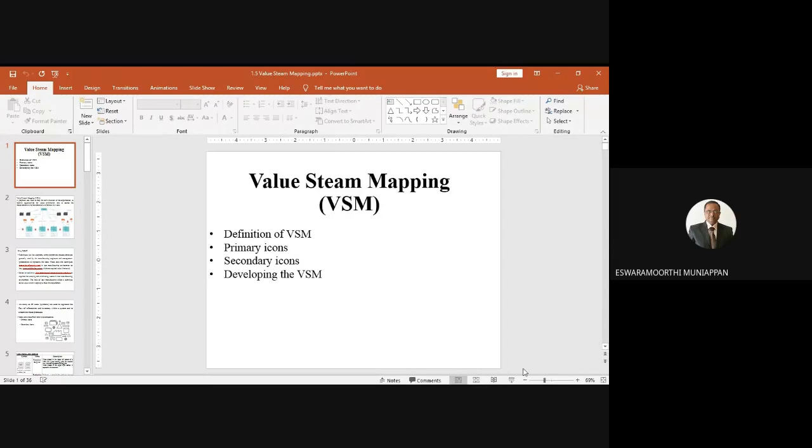Okay, value stream mapping, the icons, or we can say symbols used in value stream mapping we discussed, isn't it? Is it clear? Yes, sir. Okay, right. Today we will see how to draw a value stream mapping. Can you see the presentation? Anyone? Yes, sir. Okay, right.

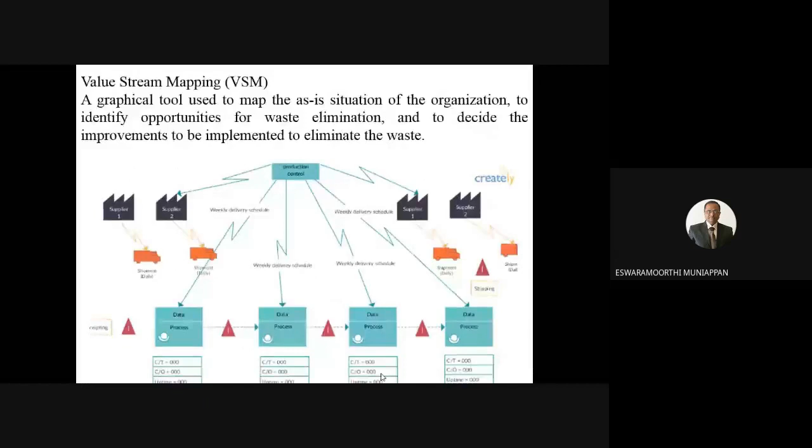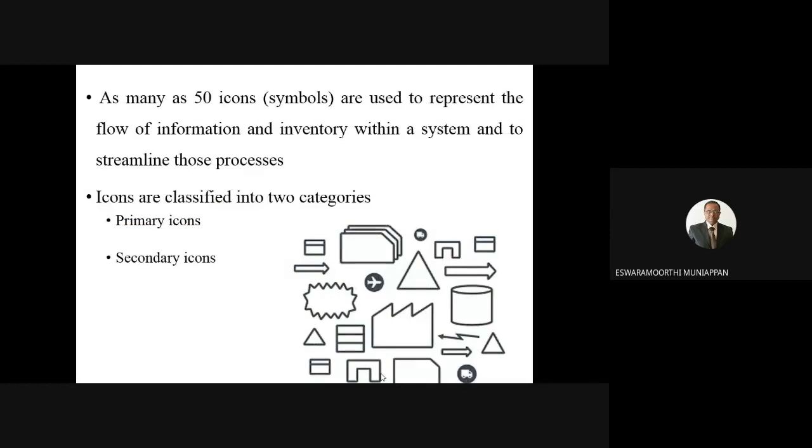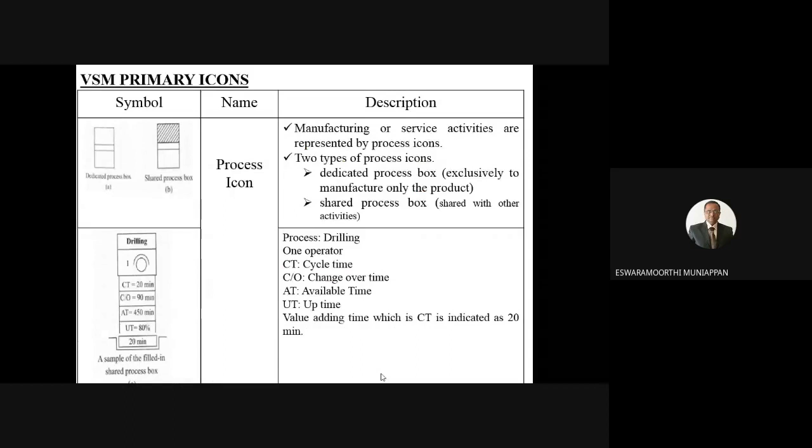Yesterday we discussed what is value stream mapping definition, primary icons, secondary icons. Then why we need value stream mapping. Then symbols and what each symbol represents, like that we have seen. Then primary symbols, or primary icons, then secondary icons. Today we are going to discuss about how to develop.

Now is it clear? Is it clear now? Sir, voice slightly breaking. For others? Yes, sir. Clear, sir. Clear. Okay.

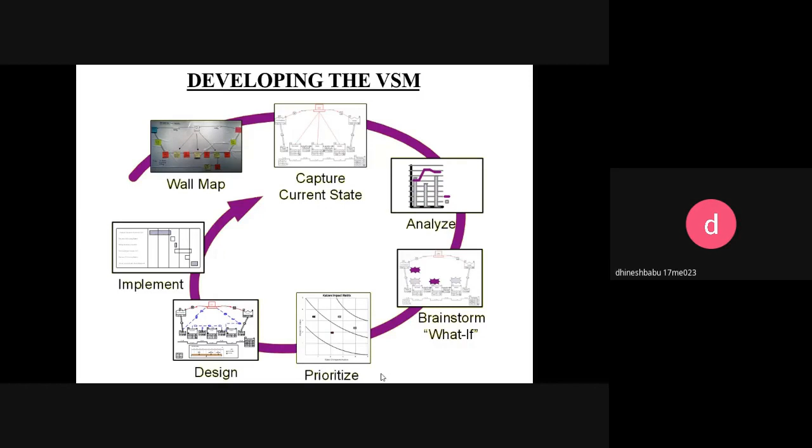Today we are going to discuss about how to develop value stream mapping. Industry, then capture current state map, then analyze with respect to value added and non-value added activities, then list out non-value added activities under various 8 types of waste, then brainstorm it. Why it is happening, what kind of waste is it, like that brainstorm, then prioritize improvements.

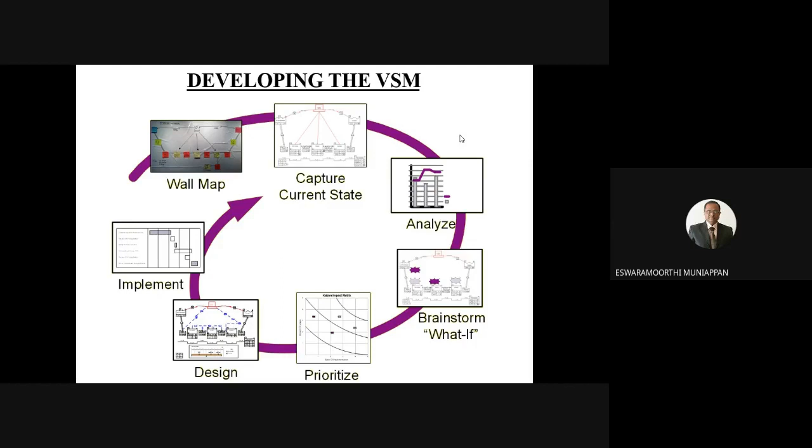Then after that you propose improvements for eliminating every waste, then design future state map, then implement. Then repeat the cycle at a regular interval, so that continuous improvement will happen. Then we can minimize waste in all activities. There are the current state map and the future state map. The future state map is having all lean concepts.

This current state reveals the existing practice in the industry. Current state map: in the first stage, the existing value stream and the activities being carried out in it are mapped. This map enables us to analyze existing practices and find out the ways of eliminating waste. Then after knowing the different types of waste prevailing in a system, we can propose the

future state mapping. After analyzing and arriving at solutions, the proposed value stream map with changes and modifications is mapped. The map thus developed during this exercise is known as the future state map. Future state map is nothing but the future where the company is going to implement the suggestions of the lean consultants.

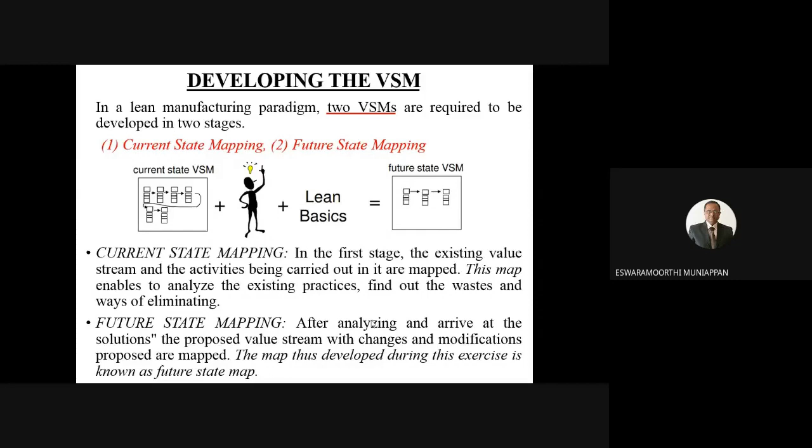So while preparing this future state map or current state map, we should always remember the 5 basic principles of lean manufacturing, which we discussed the first day itself: value, value stream, flow, pull, then perfection. These are the 5 basic principles of any lean system. That should be kept in mind while preparing the current state and future state map.

If you take any activity, you need to see it with the perspective of value, then value stream. Value stream means from raw material to output, that is a stream. Then flow, whether it is flowing without any obstructions. Then pull, are we following pull system or push system? Then perfection, how far we are meeting the customer requirement.

Suppose the customer asks for 10 components today, whether the company is ready to supply the 10 components in minimum time, without any delay. That is called perfection. These should always be kept in mind while preparing the maps. So these are the step-by-step procedure. The first one is determine the value stream to be improved.

So whatever you want to improve, that should be initially identified. Then current state map: understand how things currently operate. This is the foundation for the future state. Then redesign the process according to the lean principles, that is, by incorporating lean tools like 5S, Poka-yoke, single minute exchange of dies, etc.

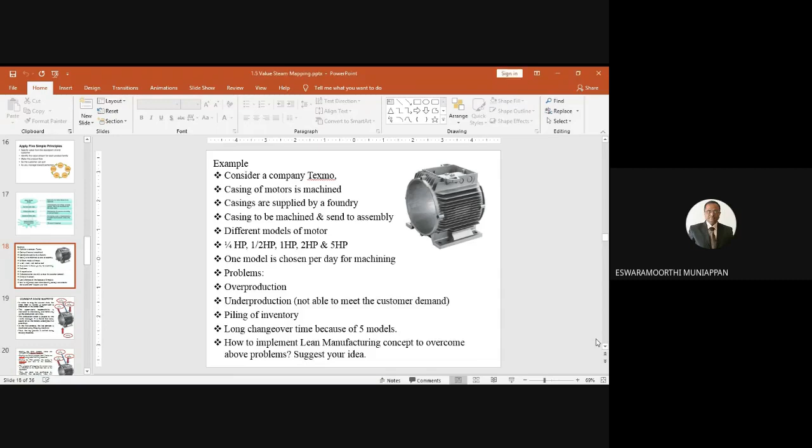Okay, sir. Right, okay. Today you listen. So next we will discuss an example. Let us consider a company called Texmo. It is a motor manufacturing company. The casing of motors is machined. Let us take this casing.

Can you see this slide? This is a motor, you might have seen one in your house also. So electric motor, the outer casing. The casing of motors is machined in Texmo, so we are taking this particular machining activity. Casings are supplied by the foundry, actually raw casings. After casting, the casing is supplied to Texmo, and they do all the machining operations.

Casing to be machined and sent to assembly. After machining, it will be sent to the assembly section. Now we are taking only the machining operations. Different models of motor are machined in this machine shop, like quarter HP, half HP, 1 HP, 2 HP, and 5 HP motors. These are all the models.

For each and every model, the size of the motor casing will change, isn't it? Quarter HP is small, half HP is a little bigger, then 1 HP is bigger than the previous one. So one model is chosen per day for machining. Currently, suppose they are getting orders for all casings, but one day they do quarter HP, another day half HP, then another day 1 HP, 2 HP, and 5 HP, and so on.

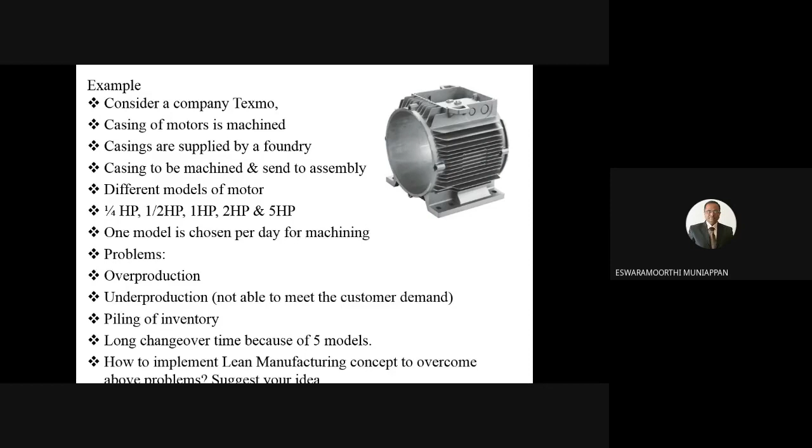Okay, right. First we will discuss the various machining operations. In order to map the current state, the shop floor is visited. As I told you, observation is very, very important. Before drawing all these things, if you want to study it, we need to visit the factory. Then a supervisor is employed in the shop floor. The supervisor in the shop floor will be contacted for getting the information, how the processes are taking place, like that.

Supervisor's responsibility is restricted to monitoring and following up the production activities. The production order is passed by the works manager. So initially, whenever this order comes, the production manager, works manager, will pass the information downstream. Okay. Then this casing of all motors undergoes 5 processes. First process: the leg portion is machined using the shaping machine. Shaping operation is done at the shaping machine.

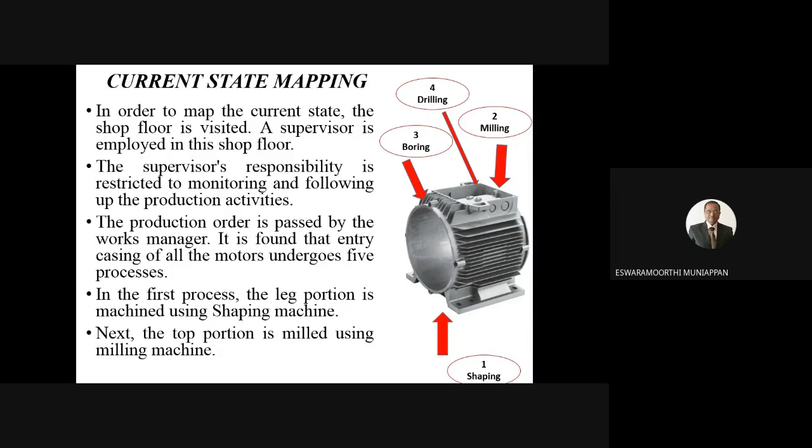You see here shaping at the bottom of the leg. This is the leg of the casing. So they do this machining operation in the shaping machine. You might be knowing the shaping machine, isn't it? Then next one, the top portion is milled using milling machine. This second process, this top portion is there, isn't it? This is milled using milling machine.

Okay. Then the third operation is holes. Holes are enlarged using boring machine. You can see here there are holes, isn't it? They use this boring machine to enlarge this hole. Fourth operation: small holes are drilled using radial drilling machine. You can see some holes are there on the top side of the casing. So radial drilling machine is used. Then fifth process is inspection. Inspection is to check the quality of the product.

Okay. The purpose of mapping the current state is informed to the supervisor and to the operators. The information should be informed to all the operators working in the machine shop and also the shop floor engineers, so that they will know for what purpose we are doing this value stream mapping and collecting data. Otherwise, in industry, workers will resist to give the information.

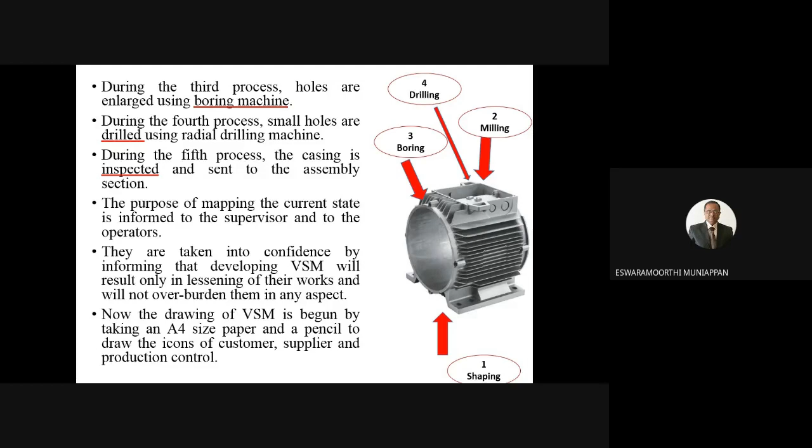Okay. Now this value stream mapping can be drawn using pencil and paper, or software is available, free software. I will show you at the end of this session. You can use the software and we can make value stream maps. Okay. Right.

First, we need to draw this customer and supplier, production control manager, works manager. He is giving instructions to the individual machines and other workers, how much to do, what to do, like that. So initially we should draw the customer icon, then the supplier icon, then the production control, and within brackets, whatever designation is followed in the industry can be written here. Works manager, right? So this is the first step.

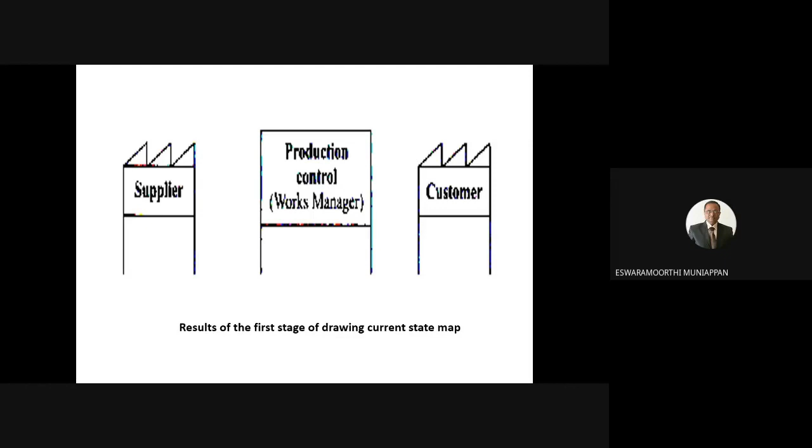It is a 16-mark question. Please follow very carefully. If you have any doubt, you can ask me at any time.

Then next, we need to fill these data. How much demand? So customer demand, right? Already we discussed this box. These kinds of symbols can be used to represent additional details. Like here you see this 1/4 HP motor model 1, 50 numbers. Then the 1/2 HP motor model 2, 40 numbers. Then 1 HP model 3, 30 numbers. 2 HP model, this is 1, 2, 3, again 20 numbers. Then 5 HP model 1, they represented like this. This is the customer demand.

Then after that we need to have this information also: duration of one shift. One shift means 8 hours, morning 8 to evening 5 o'clock. Lunch break is only 30 minutes. Then net available time for production, you reduce this lunch break, so 7 hours 30 minutes is available for effective production. So this is the second step. First step, we have drawn customer, supplier, production control. Then we fill the details of demand and the working hours.

Suppose a company is working 2 shifts, 16 hours, like that. There may be 2 breaks, isn't it? Lunch break, and if you give a tea break also, we can add it. During tea break or lunch break, we don't work, isn't it? So for net available time, we need to deduct this and calculate.

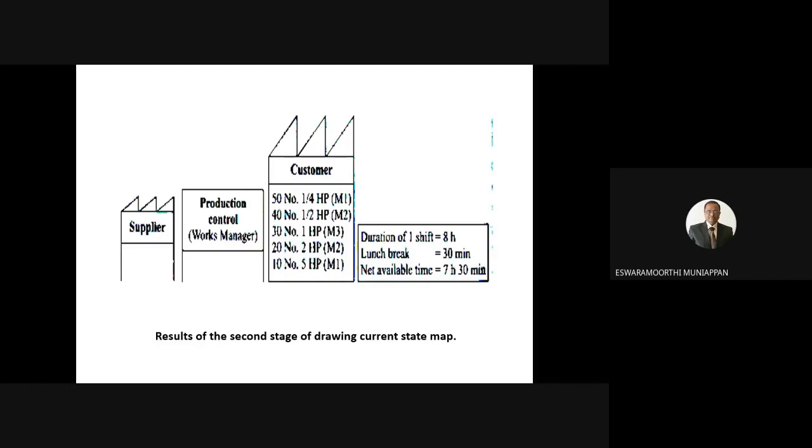Then next step is transportation. We had a customer, production control manager, then supplier. After that, material should be transported to the machine shop, so we use a truck. Here the frequency of this delivery should be mentioned; here it is weekly. Then here is the finished goods shipment to the customer. Who is the customer here? Customer is the assembly shop, isn't it? So shipment is also through this truck, every day shipping the casings to the customer.

Here this arrow is drawn without crossing the icon. So we should draw like this: on the arrow we need to draw this, we should not draw on the truck. This is an important thing we need to follow. So this is the next step. After this, we know the customer, the supplier, the production control manager, then materials supplied from the supplier to the machine shop, and finished goods supplied to the customer through trucks daily.

Then after that, machine shop details should be drawn here. We know there are 5 processes: shaping, milling, boring, drilling, and inspection. For this we should use this icon. In shaping, one operator is there, so we include the operator icon also. Milling also one operator. If there are 2 operators, we need to put 2 such symbols and mark it as 2. Milling, boring, drilling, and inspection. This is another stage, right?

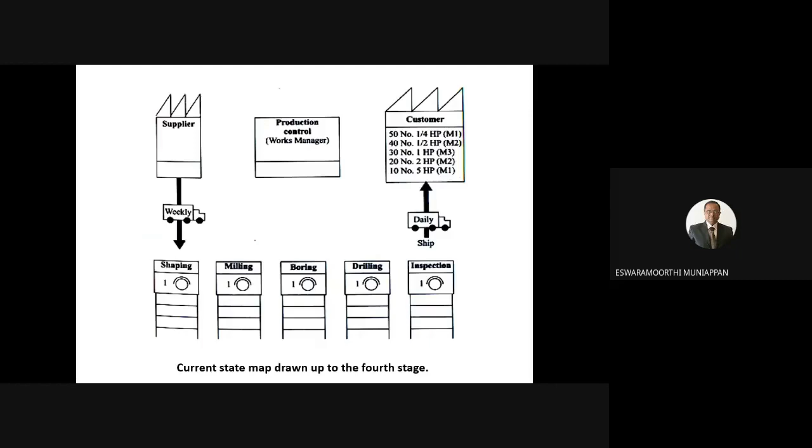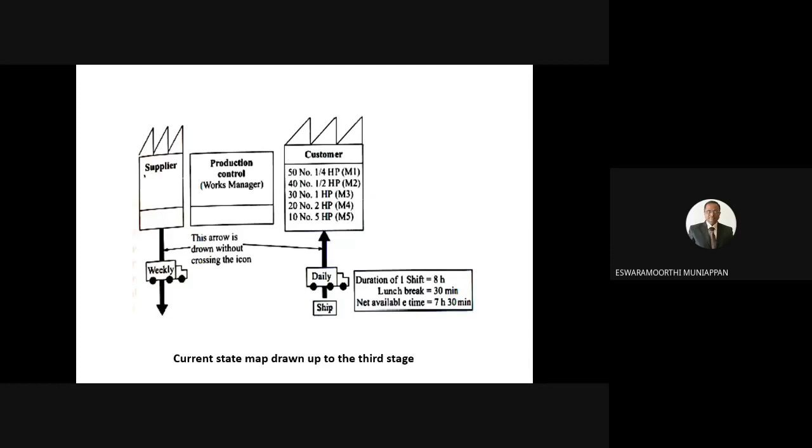Okay, is it clear, Kanna? Yes, sir. Okay. Right. Next step. So we have completed up to this.

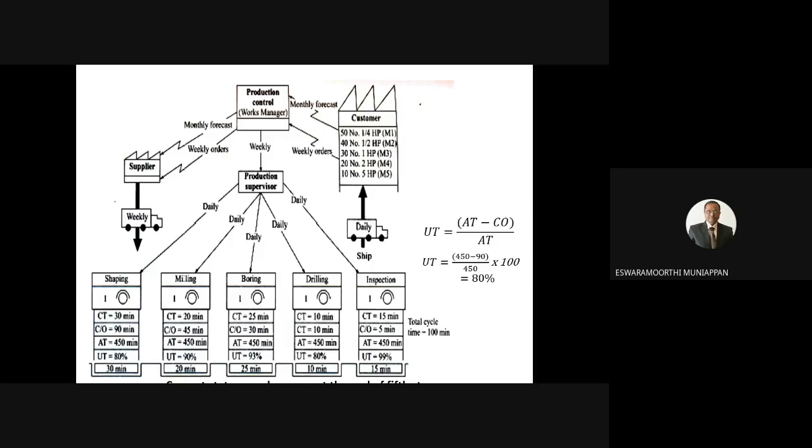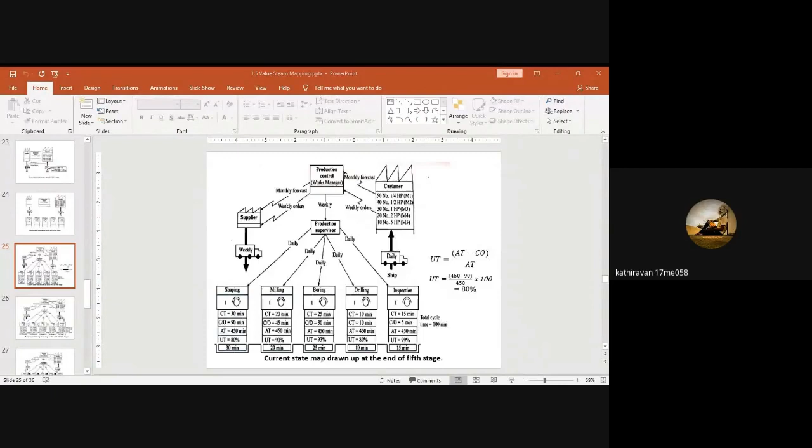Electronic. Electronic information. You see here, to the production control, this is sent either by phone or mail, or electronic media or WhatsApp, anything. That will come under this. This is the monthly forecast. Then the weekly orders, how much this customer is requiring per week, that information will also be sent to the production control.

After that, these details are sent to the production supervisor. Then from the production supervisor, it's sent to the machine operators. These are all manual messages. This is an electronic message. The production control manager is making all the plans. Then he is sending the details to the supplier: monthly, how much they require.

You see here, monthly they require 50 of this model: 40, 90, 120, 140, 150 numbers. 150 casings are required per month. That is the anticipation. Based on that forecast, the production control manager will send the requirement to the supplier. So the supplier will make arrangements for producing 150 casings per month.

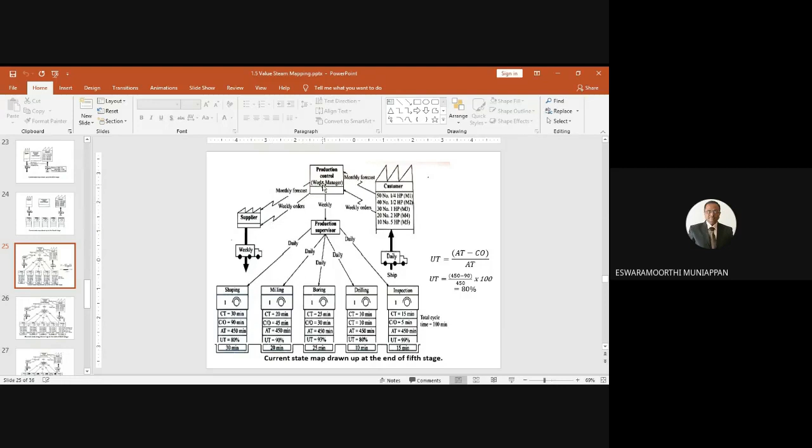Initially they will give the monthly forecast. After that, every week they will release the order, because demand may change, isn't it? It is a forecast, so demand may change. During the first week they may require 25 numbers, the second week 30, the fourth week only 10. That's why every week they will release the order. Based on this order, every week they will produce.